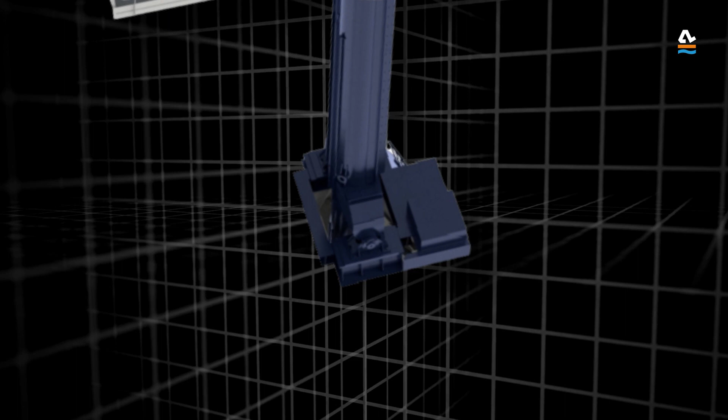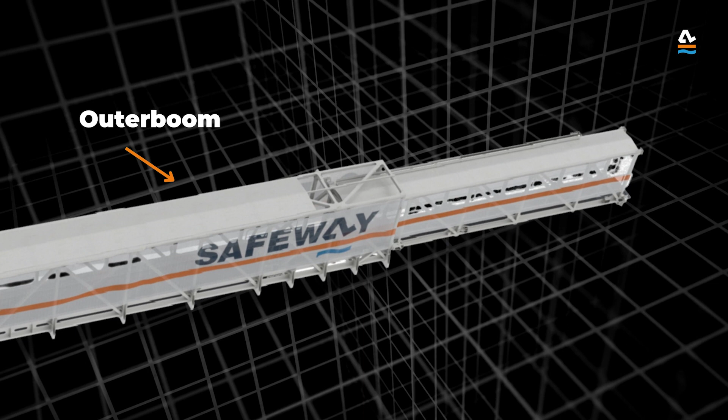Functionality overview. Let's take a look at the gangway's layout. The base of the gangway is called the pedestal, which connects to the mast with hinges. The top platform is the slew platform, while the lower platform is the waiting platform. The entrance platform is optional and only installed when necessary. The outer boom is connected to the slew platform, and the inner boom can move in and out of the outer boom.

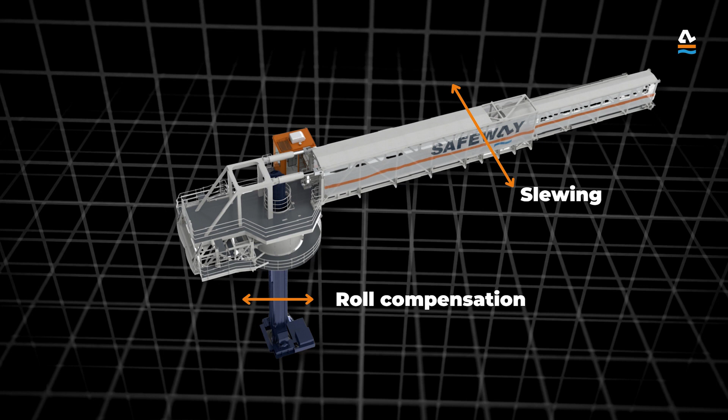The roll compensation keeps the mast vertical relative to the vessel, allowing the booms to move sideways. The inner boom can telescope in and out, while the top section can be lifted to any required height on the mast.

Emergency procedure. In case of a system failure, the alarm procedure will be activated, and emergency procedures will begin. If the alarm sounds, follow the instructions accordingly. The alarm and evacuation signal will ring for 5 seconds before the inner boom automatically retracts and slews into a safe position. This is indicated by a red flashing warning light and a siren.

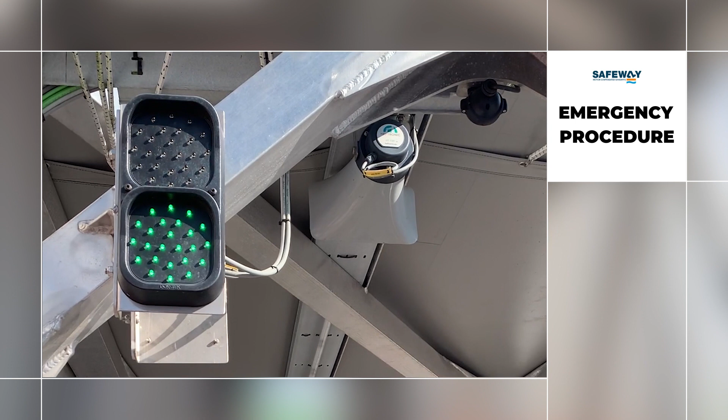Follow the procedure as follows. If you are waiting on the slew platform or stairs, turn around and return to the vessel or stay on the waiting platform. If you are on the outer boom, hold the handrail with both hands and return to the slew platform. If you are on the inner boom, hold the handrail with both hands, crouch down, and brace for movement of the gangway.

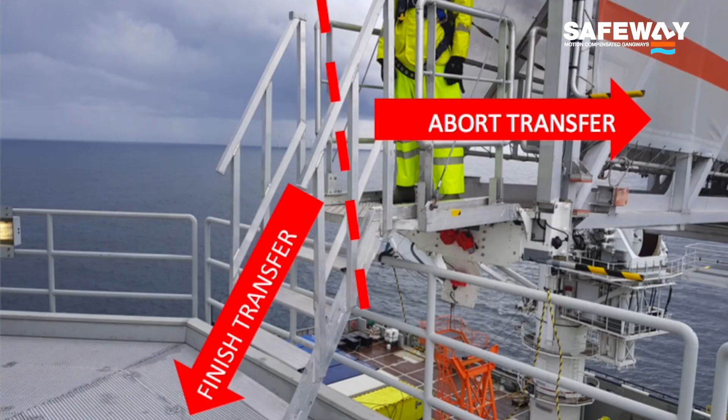If you are on the stairs, step onto the structure deck immediately and clear the stairs. If you are standing on the boom tip, step back onto the inner boom, hold the handrail with both hands, crouch down, and brace for movement of the gangway. It is important to always follow the instructions provided by Safeway's banksman or operator.

Cargo operations. Contrary to these images, during lifting operations, a tagline should always be attached to the load to keep the lift under control when landing. During lifting operations, persons on the turbine deck will function as banksmen. During all operations, persons on the turbine deck must warn the banksman to prevent possible collisions between the Safeway boom tip and the offshore structure.

Safety information card. Before using the gangway, it is essential for the transferee to carefully review the safety information card, which contains important details such as mandatory personal protective equipment (PPE), general instructions about the system, and an overview of the top section of the gangway. If the transferee has any doubts or questions, they should approach a Safeway representative for clarification.

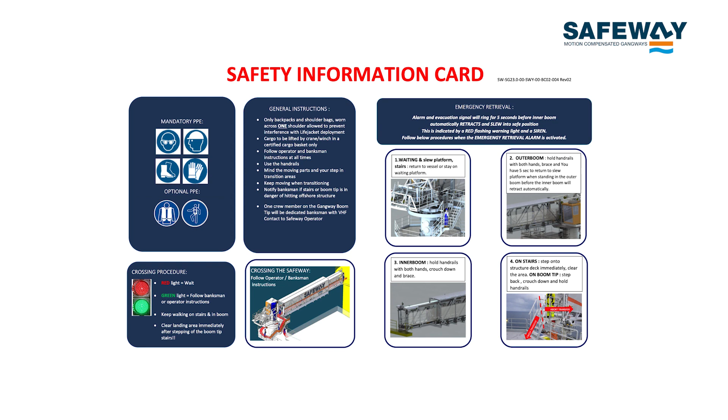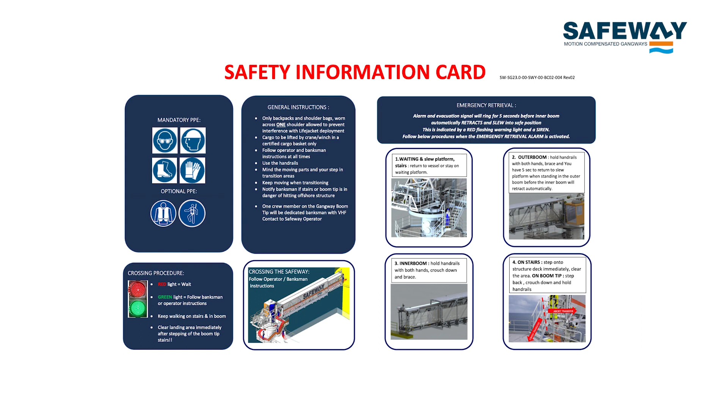The rear page of the safety information card outlines the necessary actions to be taken during an emergency retrieval. It is crucial to thoroughly study this information to ensure safety. Have a safe transfer.